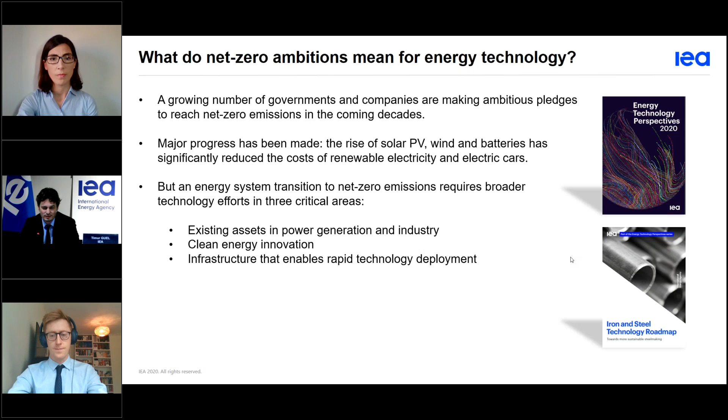A couple of last words about the importance of the iron and steel sector: iron and steel, as all of energy, doesn't move in isolation towards net zero emissions. When you look at the sectoral contributions towards reaching net zero emissions, the power generation sector will be the key sector to decarbonize, of course, but in and by itself, decarbonizing power will just not be sufficient. Heavy industries and iron and steel in particular will have a very strong role to play to reach net zero emissions. With that now, without further ado, let me pass on the word to Dr. Peter Levi. Thank you.

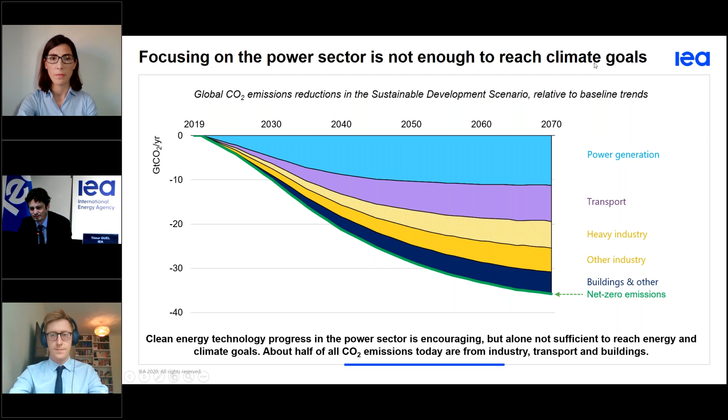Thank you very much, Timur. Just to check if you can hear me on your end.

Great, thank you. So as Timur said there and set the scene, there are some sectors of the energy system in this wedge graph that Timur showed where emissions are expected to be harder to abate than in other sectors. In the industry sector, we're talking here about the chemicals, iron and steel, and cement sectors, collectively referred to as heavy industry sectors. Heavy industry sectors use large quantities of fossil fuels for three main purposes: to generate high temperature heat, for use as feedstock, and for use as chemical reducing agents.

When we look at the emissions from these three sectors, we can see that despite the chemical sector consuming the most energy, the steel and cement sectors have much higher direct emissions. And this is because of the use of fossil fuels as feedstock in the chemical sector and the large contribution of process emissions. The iron and steel sector generates around 2.6 gigatons per year of CO2, which is more than the quantity generated by all road freight vehicles today. Coal accounts for around 3/4 of the final energy inputs, much of which is used as a reducing agent in the form of coke in the sector.

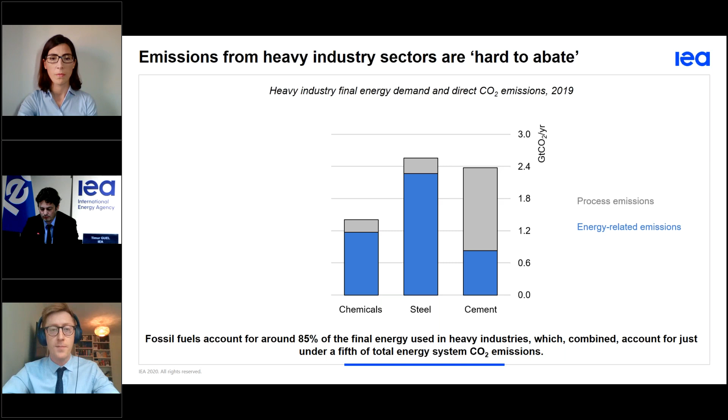Beyond these challenges that are broadly common to the heavy industry sectors, there are two further factors that make iron and steel a particularly difficult sector in which to reduce emissions. Firstly, steel is a globally traded commodity, which makes it difficult for first movers on innovative processes to develop these processes and maintain competitiveness at the same time. And secondly, the sector's existing assets, as Timur touched upon in the introduction, are long-lived and capital-intensive.

Without any alteration to their current mode of operation, existing assets in the iron and steel sector could lead to around 65 gigatons of CO2 emissions if operated until the end of their typical lifetimes. This is equivalent to around 2 years of energy-related emissions from the entire energy system, and would put a sustainable trajectory for the sector completely out of reach if they weren't addressed. Relative to a typical lifetime of around 40 years, we estimate that the most emissions-intensive units in the sector are currently around 13 years old on average globally.

There's a huge concentration of capacity in China, which accounts for around 60% of iron making capacity. And much of the country's enormous fleet has been installed in the last 2 decades. Some advanced economies appear to have relatively recently renewed fleets, such as those in Europe. In these instances, it is likely that a blast furnace or another major piece of equipment has undergone a major refurbishment, one that is often the same order of magnitude in cost as the investment required for a brand new plant, such as the relining of the blast furnace.

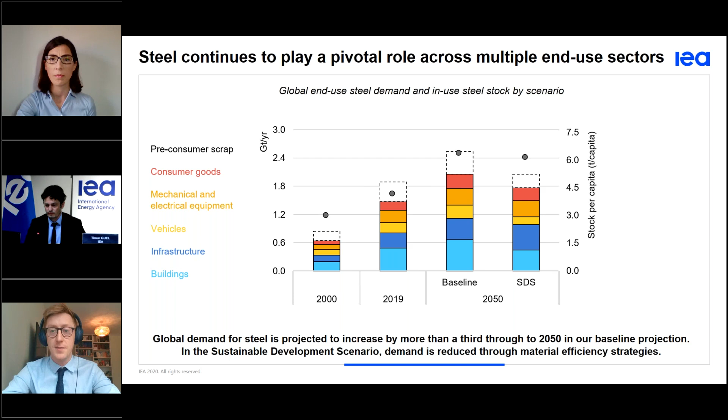Material efficiency, as I kind of alluded to there, explains the difference in the demand and production outlooks for each scenario. Material efficiency strategies are measures that are taken to make more efficient use of steel while still providing the same material services that consumers of steel require. These include measures taken both within the manufacturing supply chain and downstream in the design and use phases of the transport and building sectors in particular.

In the Sustainable Development Scenario, steel used to build our energy infrastructure drives up demand in particular end-use segments, with demand in the power sector in 2050 about 3 times as high as in the baseline projection, and rail infrastructure about 1/3 higher. However, these segments account for a relatively small proportion of the total end use of steel to begin with, and the increases in their use are far outweighed by the combined impact of demand reduction from material efficiency.

A non-negligible portion of the demand reduction occurs in the sustainable development scenario by improving yields and reducing scrap generation. Yield improvements account for around 1/5 of the reductions in steel demand in 2050 in the sustainable development scenario. But a much larger proportion is made by changes in the design and use of certain steel products, changes that are beyond the direct control of the steel sector.

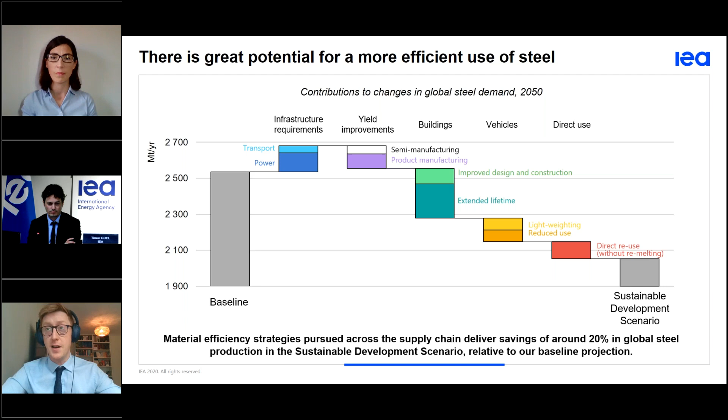Together with the direct reuse of products without remelting them, such as beams recovered from demolished buildings, changes in the way buildings and vehicles are designed and manufactured account for the lion's share, 80% of the reductions in steel demand in 2050. Overall, steel demand is about 20% lower in 2050 than in our baseline projection, so 20% lower in the sustainable development scenario.

Material efficiency, though, is just one of a portfolio of mitigation strategies adopted in the iron and steel sector in the sustainable development scenario, in which direct emissions from the sector decline by more than 50% by 2050 relative to today's levels. And this corresponds to a decline in the emissions intensity of crude steel production of around 2/3 because demand is slightly higher in the SDS.

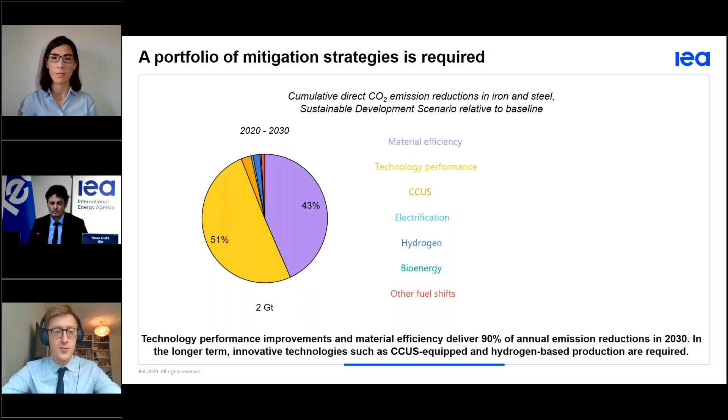When we look at the short term, it is indeed material efficiency and technology performance improvements that contribute the lion's share of emissions reductions. So more than 90% of the cumulative reductions to 2030 are attributable to these 2 measures. While these measures play critical roles, they are incremental measures and they cannot alone deliver a step change in the emissions intensity of primary steel production in particular.

When looking at the whole modelling horizon through to 2050, we can see that a host of other measures come into play. Material efficiency is the single largest contributor overall at 40% of cumulative reductions. Technology performance improvements deliver around 1/5, and this category includes the adoption of best available technologies and improvements to the way processes are operated and controlled. This might be a smaller share than one might have thought, but this reflects the fact that increases in energy efficiency are already well incentivized in the steel sector.

Hydrogen and CCUS together account for around a quarter of cumulative emissions reductions, which stem from the deployment of innovative technologies, which is something I'll come into in more detail on the next slide. And a series of other measures, including the use of bioenergy and other fuel shifts, including to natural gas and to electricity, contribute the remaining portion of cumulative reductions.

With respect to electrification, the relatively minor role is because the shift to secondary production that takes place in the sustainable development scenario largely takes place in the stated policies scenario as well. So the delta between them is not so big. Bioenergy, as mentioned earlier, faces sustainability constraints and is in high demand across the energy system in the context of the sustainable development scenario. Although it does play an important role in certain regions like South America, where charcoal-based blast furnaces are already operating commercially.

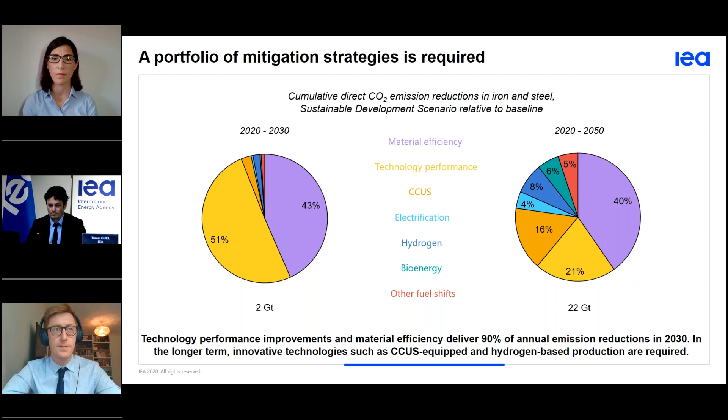So, now I'd just like to unpack the role that each of these technology families plays by looking at the deployment of specific groups of processes in the sustainable development scenario. The first thing to note is that both primary and secondary conventional processes do still play a role in 2050, but their trajectories diverge. The scrap-based electric arc furnace route nearly doubles its share of crude steel production in 2050, while the share attributable to the blast furnace basic oxygen furnace route declines from around 3/4 today to around 30% in 2050.

CCUS equipped routes, including innovative blast furnaces, innovative DRI and smelting reduction concepts, account for around a quarter of primary production by 2050, up from just one single plant operating commercially in the United Arab Emirates today. Hydrogen is used as a blending agent in DRI furnaces and blast furnaces, but much more importantly in the dedicated pure 100% hydrogen-based DRI EAF route. This route, the hydrogen-based DRI route, accounts for around 15% of primary production by 2050.

These process shifts have a profound impact on the energy mix of the sector, as one might expect. Unabated fossil fuel use declines from 85% of energy inputs today to around 45% in 2050. Electricity demand surges, more than doubling its share of final energy consumption, just under a third of which by 2050 is used to generate electrolytic hydrogen. Bioenergy demand also increases its share dramatically, but as mentioned before, its overall consumption is constrained by limits on its

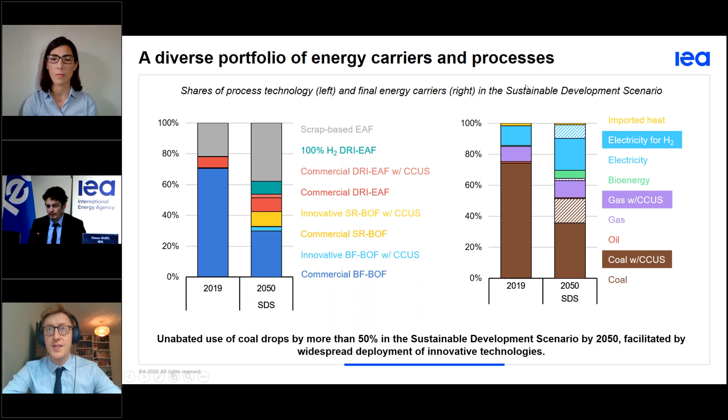Of course, the steel sector does not operate in a vacuum, and this is one of the things that Timur mentioned in setting the scene. The changes in the way that steel is produced will have significant impacts and implications for other energy infrastructure assets, and particularly the CCUS equipped routes and those making use of hydrogen. Just to recap the situation today, around 1.4 gigatons of iron is produced each year, virtually all of this without the use of CCUS or hydrogen. By 2050, overall iron needs have declined slightly due to increased scrap availability and the adoption of material efficiency strategies that I outlined earlier. And around 40% of the total is produced using CCUS or hydrogen to manage or avoid the CO2 generated.

The CCUS equipped production implies the need for infrastructure able to capture, transport and store around 400 million tons of CO2 per year by 2050. And to satisfy this need, one large CO2 capture facility able to capture 1 million tons of CO2 per year would need to be installed every 2 to 3 weeks from 2030. The Northern Lights project in Norway is a good example of a full-scale demonstration of the CCUS value chain involving different CO2 sources, including industrial ones, although in this case it's cement rather than steel that's the industry source there.

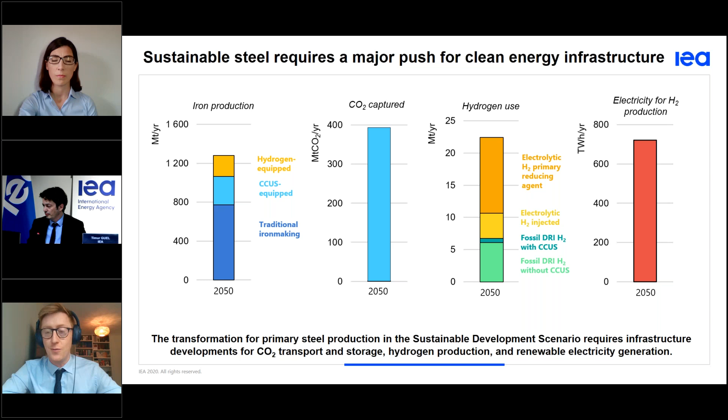The challenge is similarly impressive when it comes to hydrogen production and the infrastructure required to produce it. So around 5 million tons of dedicated hydrogen production is used in DRI units today, albeit mixed with carbon monoxide and virtually all of it without CCUS. By 2050, this volume expands to around 23 million tons, with 3/4 of this being generated via low carbon routes. The electrolytic portion of this low carbon hydrogen, which is the vast majority of the low carbon portion, or about 16 million tons in total, requires around 700 terawatt hours of electricity per year by 2050 to generate it. Besides the gigawatts of renewable power infrastructure, this would require around 165 gigawatts of electrolyzer capacity compared to around 0.2 gigawatts of capacity installed across the system today.

The role of innovative technologies is underscored when we look at the innovation dimension of this equation. So, taking the annual emission reductions in 2050 in the Sustainable Development Scenario, relative to our baseline projection, we can see that just under half stem from technologies that are at demonstration or large prototype stages today. This shows that deep reductions in emissions will not be possible unless the technologies currently at early stages of development are carried through to commercial deployment and rapidly scaled up. Here we can think of the hydrogen-based DRI route or the innovative smelting reduction route, currently progressing through successively larger pilot and demonstration projects. If these are not followed through, the pathway we outline in the Sustainable Development Scenario won't be possible.

Now, some companies and governments have announced net zero targets for 2050, and while this is not a globally adopted goal, in our analysis, we wanted to look into the feasibility of reaching this target for the energy system in ETP 2020 and by extension in the steel sector in this publication. For this, we used the faster innovation case. And the result is that around 1 gigaton further of emissions reductions are required beyond that in the Sustainable Development Scenario in 2050. This necessitates a step change in ambition when it comes to innovation. Technologies at demonstration and prototype stage today need to reach markets within the next 6 years, which is twice as fast as in the Sustainable Development Scenario.

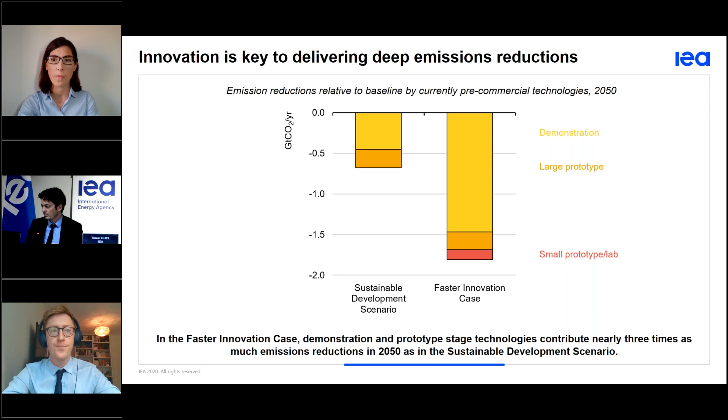Now, I just want to conclude with a word on the roles of the various actors and key enabling mechanisms required to realize the Sustainable Development Scenario as we lay it out in the publication. And I should just note that there's a whole chapter dedicated to this in the roadmap. And while we're unable to prescribe specific actions for every stakeholder and every jurisdiction, we cover in detail the current policy landscape as we find it for the iron and steel sector, and the menu of options available to accelerate progress in this area.

Coordinated efforts from a diverse range of stakeholders are required, but the overarching driver of change lies in setting long-term plans and establishing a clear, reliable policy signal for emissions reductions. Here, governments will play an important role. Additionally, targeted efforts are needed for specific technology areas, including emissions-intensive technologies that will still be required for some years to come, and clean technologies that are at varying stages of development today.

Steel producers will need to make detailed plans for their existing assets, and their efforts in the realm of innovation will be critical. Government support for RD&D and subsequent early deployment is also likely to be needed. A focus on material efficiency can help increase the quantities of scrap available for secondary production and therefore reduce the need for additional primary production capacity, which is emissions intensive with current technologies. Efforts from actors along the value chains from design to end of life will be important, as are the regulations to support these interactions.